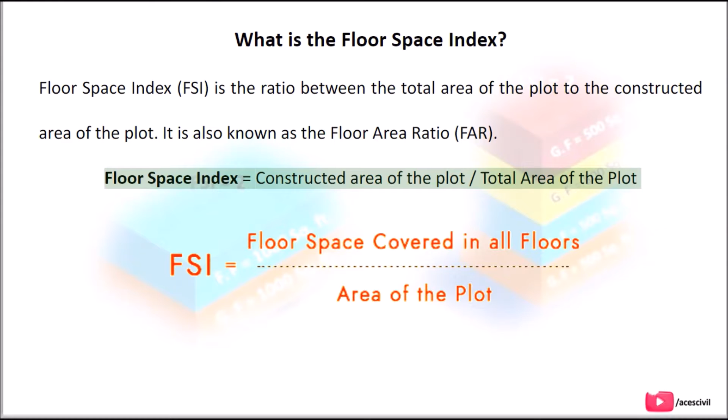Assume you have a 2,000 square foot plot area where you have built a building, ground floor alone, in 1,500 square foot and left the remaining space for a garden. Now the FSI equals 1,500 divided by 2,000 equals 0.75. The constructed area also adds up if you build the second floor.

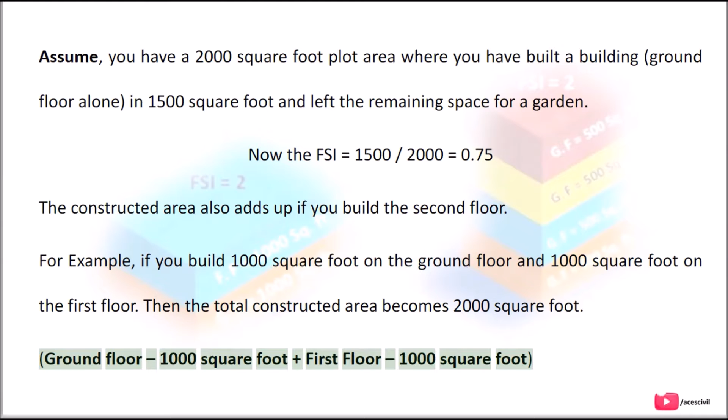For example, if you build 1,000 square foot on the ground floor and 1,000 square foot on the first floor, then the total constructed area becomes 2,000 square foot. Ground floor 1,000 square foot and first floor 1,000 square foot. Now the FSI equals 2,000/2,000 equals 1. Why do we need FSI?

Every person on earth wants to get ownership of their belongings to its fullest extent. No one wants to share their property with others. If it happens with everyone, then it will be hard for the environment to maintain its generosity. It also impacts the urban development of the city. It will become hard for people to get fresh air.

It will become hard for people to commute. It will become hard for people to park their vehicle and so on. It will become difficult for people to maintain the environment's greenery. The road becomes more trafficked and polluted.

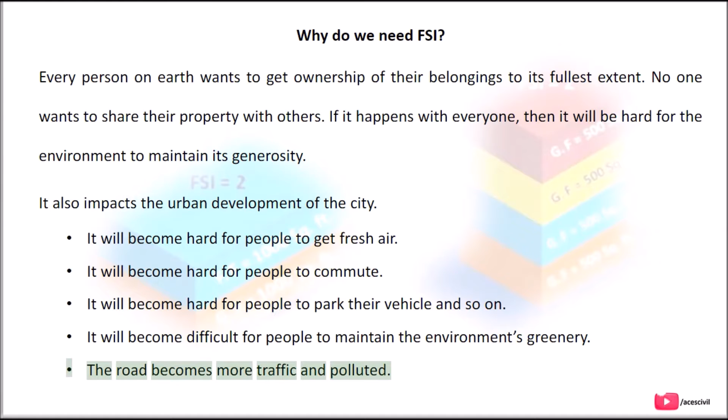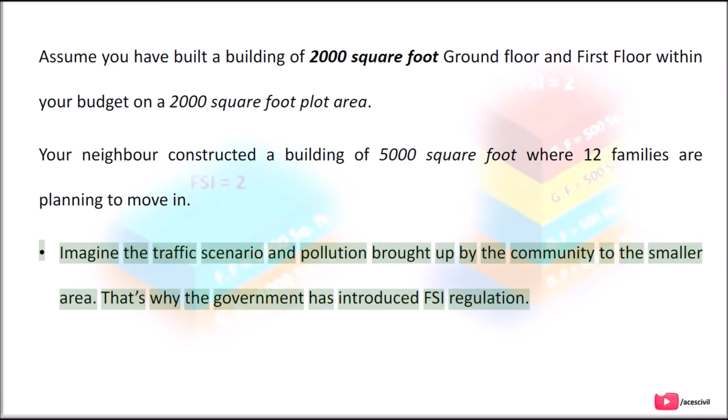Assume you have built a building of 2,000 square foot, ground floor and first floor, within your budget on a 2,000 square foot plot area. Your neighbor constructed a building of 5,000 square foot where 12 families are planning to move in. Imagine the traffic scenario and pollution brought by the community to the smaller area. That's why the government has introduced FSI regulation.

How is FSI calculated? An individual does not calculate FSI for a city. It is a guideline by the Directorate of Town and Country Planning, DTCP, department for every city and depends on many factors such as plot size, road width, type of the building, residential or commercial, transit-oriented development zones, influential zones, premium FSI, population growth, current population of city, infrastructure.

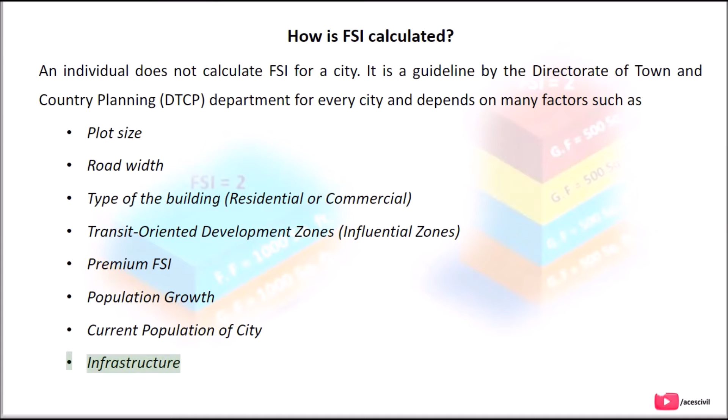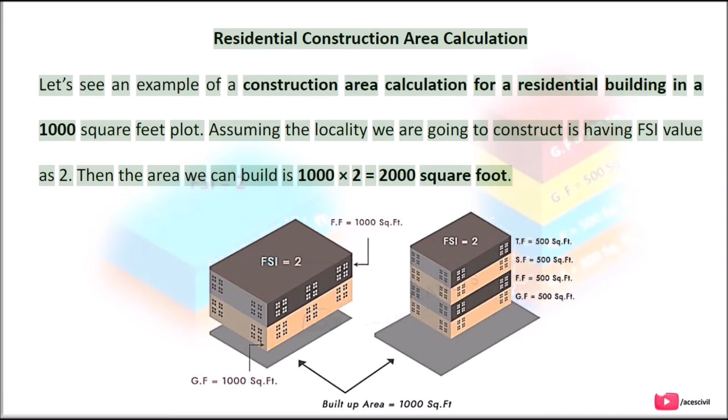Residential construction area calculation. Let's see an example of a construction area calculation for a residential building in a 1000 square feet plot. Assuming the locality we are going to construct in has an FSI value of 2, then the area we can build is 1000 times 2 equals 2000 square foot. We can either construct it as floors of 500 square foot, or we can build it as a single floor of 2000 square feet. It is up to our choice, also depending on the below factors.

To comply with the DTCP regulations, you have to provide minimum setback around the building, build within max ground coverage, and provide an adequate parking area. The balcony and terrace can be excluded from the floor space index area. Only covered areas will be included in the calculation.

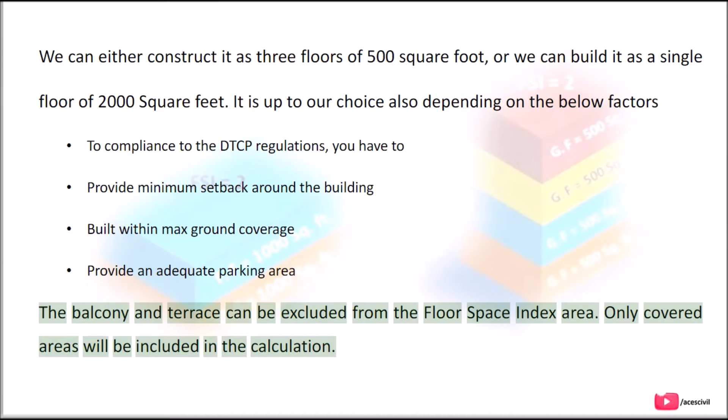Benefits of FSI. Following FSI regulations will be beneficial to both the owner and the town or city. It provides adequate fresh air and sunlight. It ensures the ratio of open and developed space of the city. It ensures the layout of the city or town. It ensures the planned growth of the area. It provides adequate commute facility for the locals. It preserves the environment and controls the pollution.

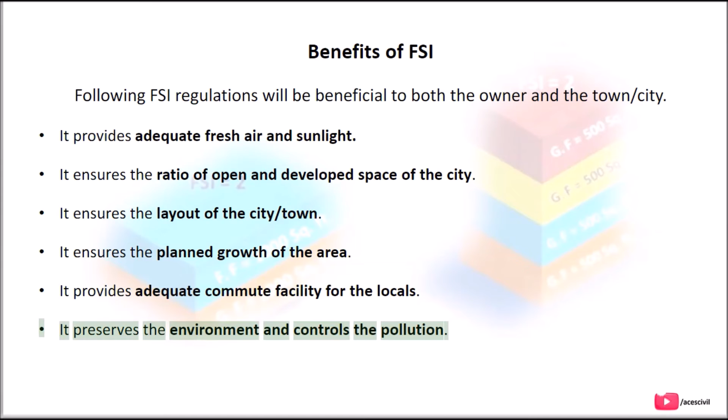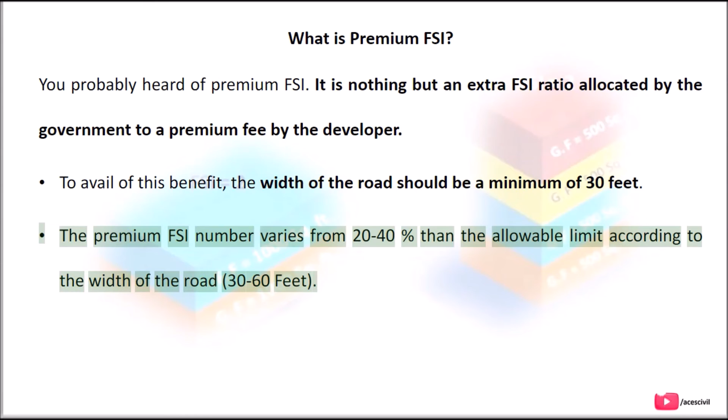What is Premium FSI? You probably heard of Premium FSI. It is nothing but an extra FSI ratio allocated by the government for a premium fee paid by the developer. To avail of this benefit, the width of the road should be a minimum of 30 feet. The premium FSI number varies from 20 to 40% above the allowable limit according to the width of the road, 30 to 60 feet.

Example calculation. Assuming you have paid a premium fee to get extra premium FSI of 20%. Now, how much area can be constructed? Total construction area equals area of plot times normal FSI times premium FSI, assuming you have 2000 square foot of the plot. Total construction area equals 2000 times 1.5 times 120% equals 3600 square foot.

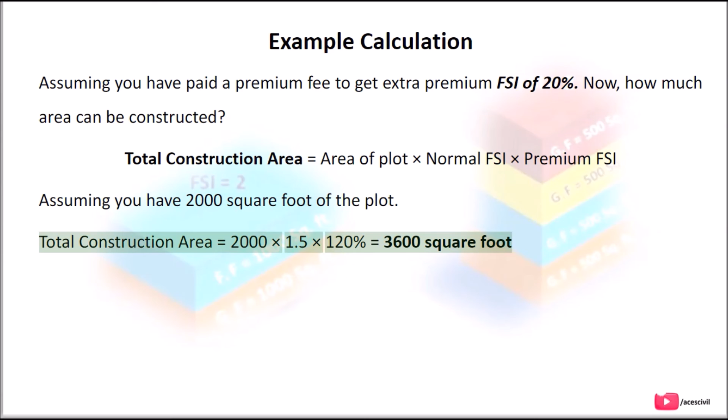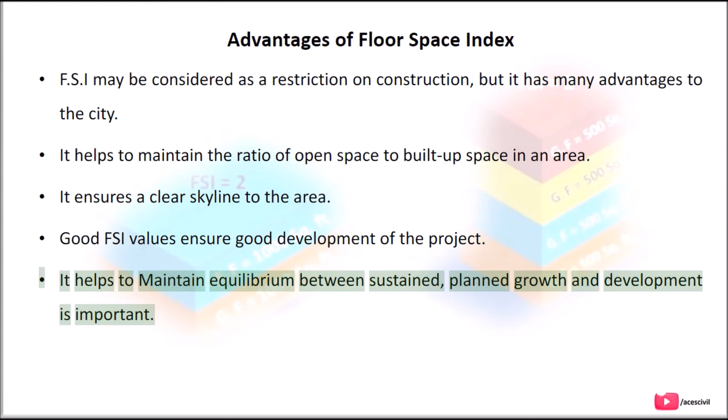Advantages of floor space index. FSI may be considered as a restriction on construction, but it has many advantages to the city. It helps to maintain the ratio of open space to built-up space in an area. It ensures a clear skyline to the area. Good FSI values ensure good development of the project. It helps to maintain equilibrium between sustained, planned growth and development, which is important.